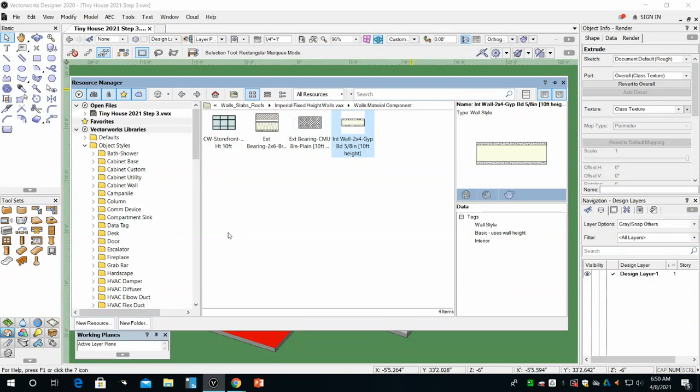All I'm going to do is go into my resource manager, create a new resource, and it's going to be a RenderWorks texture. I'll name this paint walls tan. I'll start all my paint colors with the word 'paint' so they show up together in alphabetical order in my resources. Now I'm going to choose just a plain color.

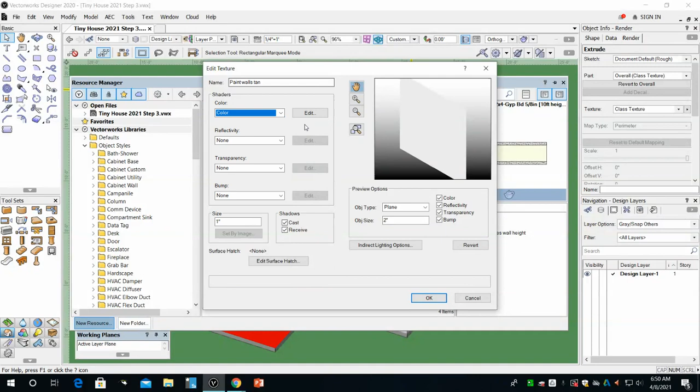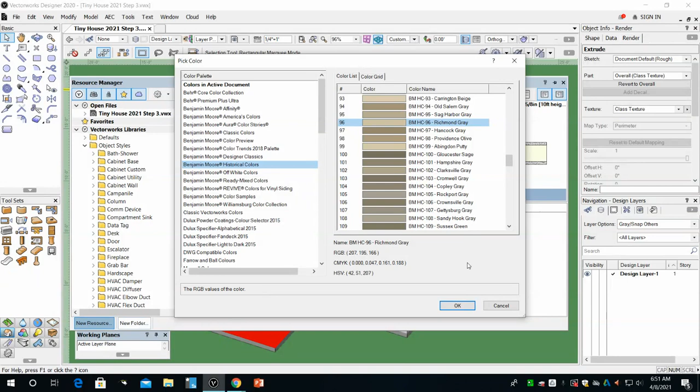I'm going to edit that color. I have an option here, just like if I walked into a paint store with a rack of paint chips to look at. I'm going to choose those paint chips. These are actual Benjamin Moore colors that I could order. You can use any of these paint colors you like. I'm going to go with this tan color right here. I'll double click it, click OK, OK.

You can see I've created that tan color, named paint walls tan. I'll click OK, and now I'm going to try and put that on the inside of this wall and the inside of this wall. When I select that wall in the object info palette, it gives me some choices up here in these tabs. I'm going to choose render, and I'm going to choose by object.

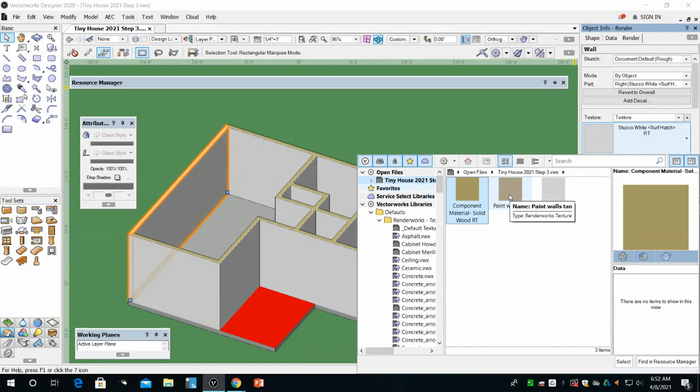When I do that, it lets me select either the right side, the left side, or the overall, which is the center of the wall. I'm going to try the right side—depends on which way you drew your walls. I'll choose my textures, and select the paint walls tan I just created, and you can see that wall changed to the tan color.

I'll do the same thing on these other walls. Just select the wall, go to the render tab, by object, the right side, tan—and you can see that starts painting those walls a tan color.

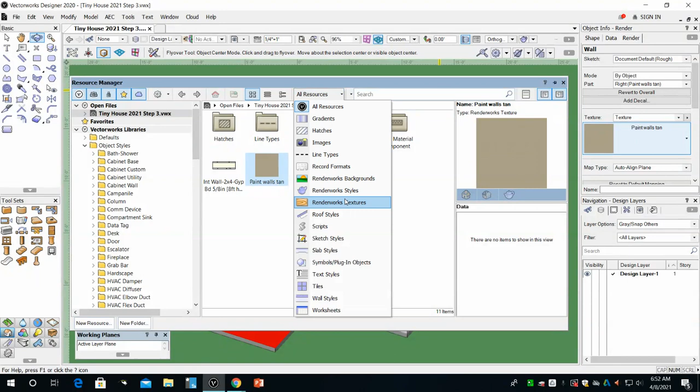Now there are also some options if we go into our RenderWorks textures and search for paints. There are some default options in there as well that we can use—a lot of different paint colors. So I might try this paint brown color on one of the walls.

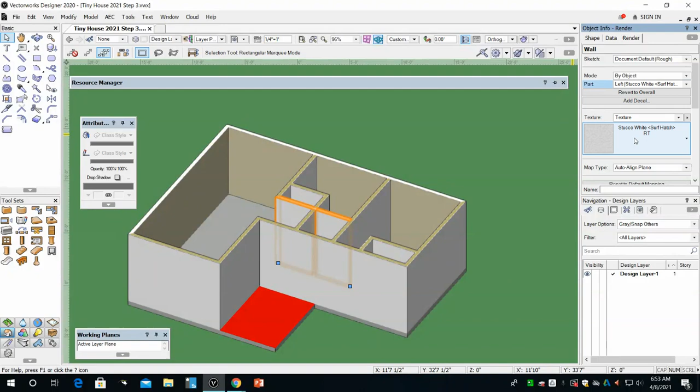That must be on the other side—if we spun that around, we would see it. I'm just going to put it on both sides. There we go. So that's how we can add paint colors to these walls.

Now, if I wanted this room to just be painted a separate color, I'm going to have to split this wall and make it into two different walls if I wanted to have some different textures on there.

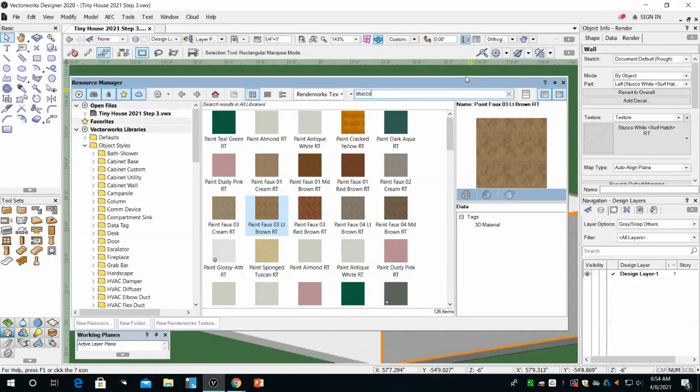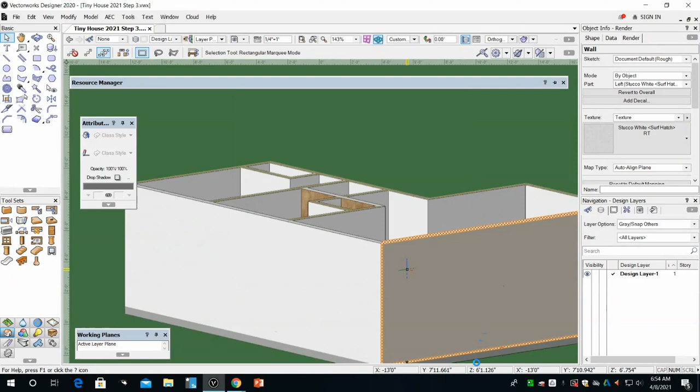Let's try the outside. I'm going to select this wall, and again choose the left side. In here, I could search all different types of exterior finish materials—there's all kinds of stuccos. So there's a tan stucco put on there. Now some of these, just because we put them on and it says it over here, we still might need to edit them—to make that look like a real stucco, I'd increase the grain size on that.

Let's try a brick—there's a traditional brick running bond pattern. That looks pretty good on there too.

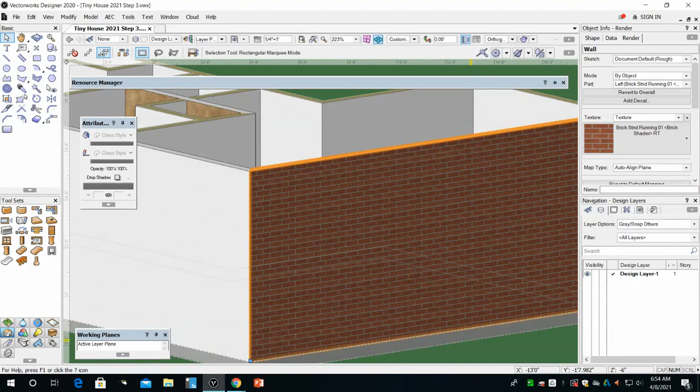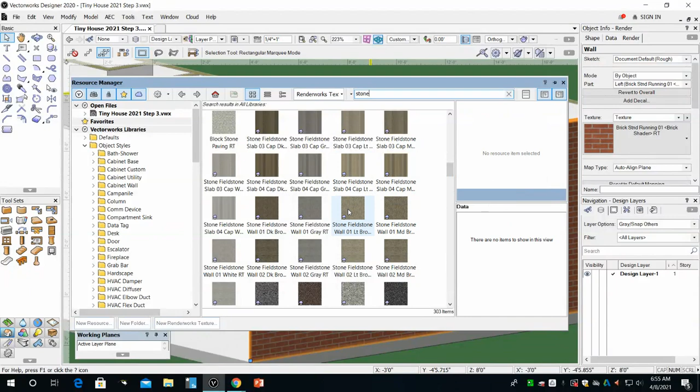Now there's a lot of stone textures. Some will work well, some would look horrible. If we did the stone slabs, they typically don't work well, but there are some, like a fieldstone, that probably would look good, while this slab would look bad. I'm going to try this fieldstone right now, and that looks pretty nice.

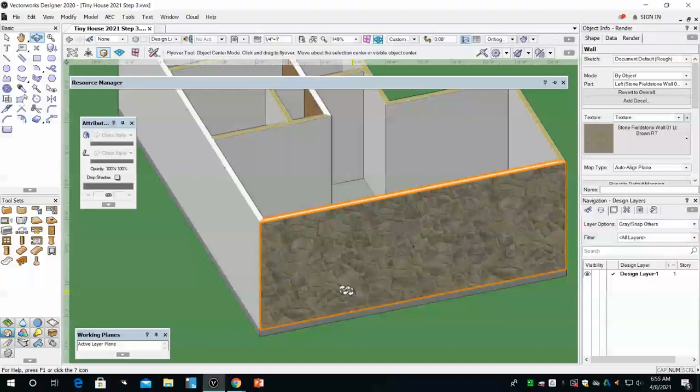There's wood siding, vinyl siding, all different types of siding materials. Remember, you need to have 2 different siding materials for this project. That's how we'll get started adding paint to the inside and siding materials to the outside for this project.